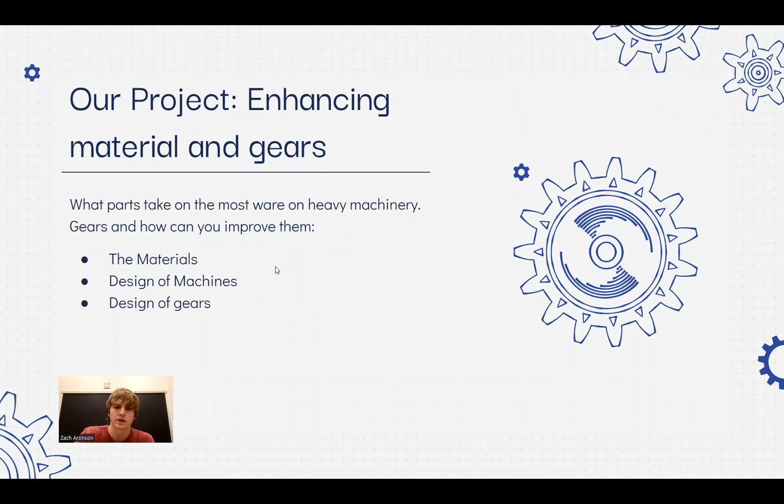The materials we decided to use for our idea would be an expensive material, but higher quality, which would be aluminum bronze, to make sure they were able to withstand longer and we didn't have to take as long to replace them.

The designs of the gears would depend on what they're being used for. The bigger ones would have more power behind them and take longer, but the smaller ones would have faster rotations, though they would be more finicky and used for smaller operations of the gears.

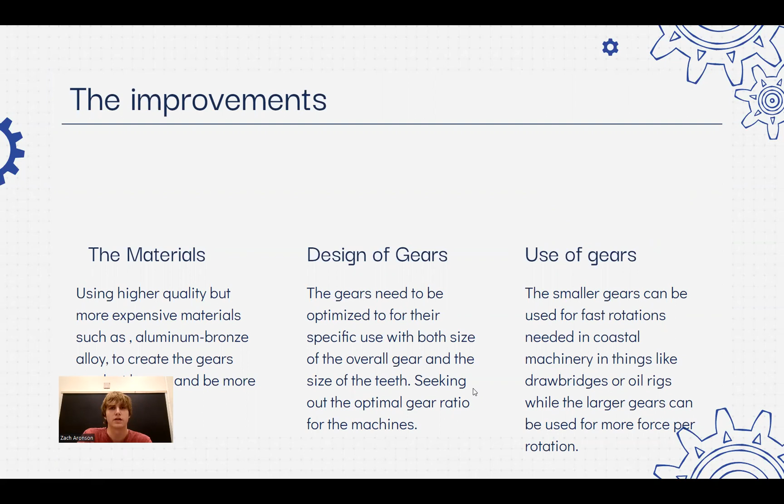It was also important for us to find what gear ratio we needed to make sure that the gears were optimized in a way that we could use them.

Corrosion was a big part for the gears we were using, because since it was a coastal area, salt water corroded the gears faster than it would normally. So we needed to make sure the metals we used were more resistant to corrosion.

We wanted to make sure the metals were more dense because they needed to be stronger since they were used more often in coastal areas. Also, if a machine fails in coastal areas and things get wet, it's a lot harder to repair.

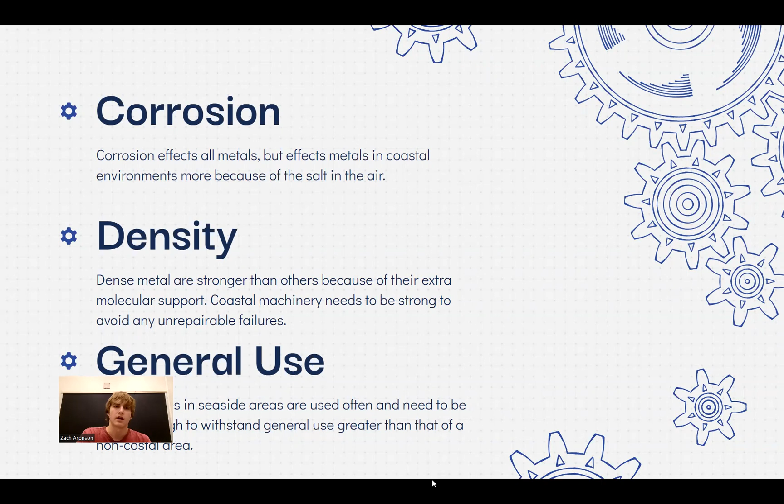What role does chemistry play? Basically, we were looking at the building blocks of the different machines, which are gears, and chemistry is the building blocks of the elements that make the gears.

Our team was Carter, Brandon, John, and Zach, with Carter being the team leader, Brandon being the team facilitator, John being the project manager, and Zach being the research facilitator.

Some of the challenges we faced were being able to find time during different schedules and commitments, and coming together on a single idea. But we made sure to plan around everyone's schedule and make sure everyone's input and ideas were out there when we were choosing our thesis.

Hello, I'm Zach. I'm the people person on the team. So we had several original theses.

Our first thesis, which was the one we ended up going with, was the first thing we thought of when we got assigned mechanical engineering for our problem. It was about gears, what type of gears, and how the metal is affected by salt water and the coastal environment. Our second proposal was thinking about how much destructive force is on the coast and how structures need redundant supports and to be built to survive the extremes.

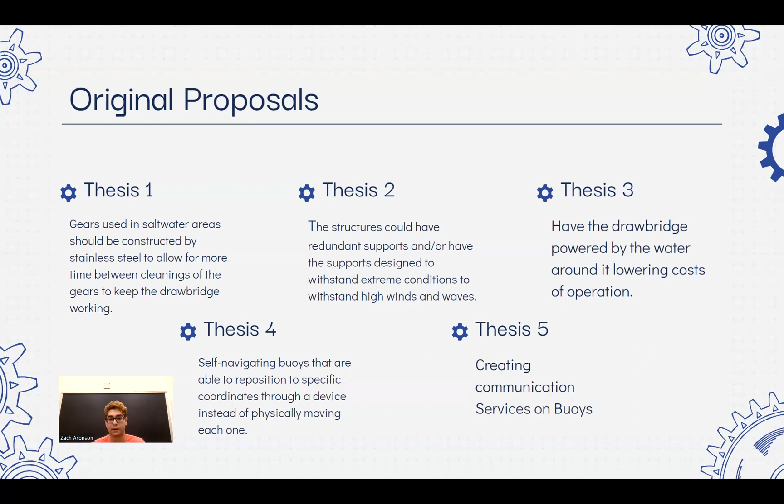Now, figure one, one of the places we visited on the boat trip was the SS Selma. This is a boat made out of concrete and rebar, and we can show how much rust all of the metal has gone through, and the corrosion and mass amounts of damage that the ocean has done to it.

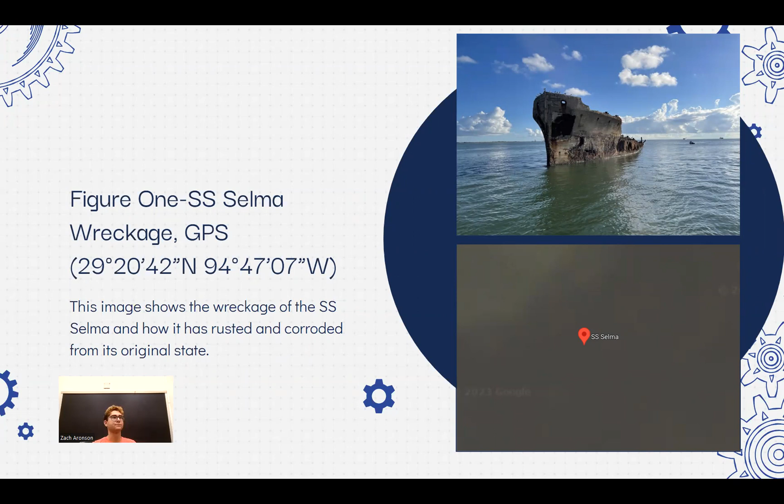We're looking at our Figure 2 here at Pelican Island Causeway. We got to see the on-ramp that we take every day to go to school and see how dependent it is on gears and how much mechanical requirements it needs. Just connecting that back is seeing the requirements for each process that we have.

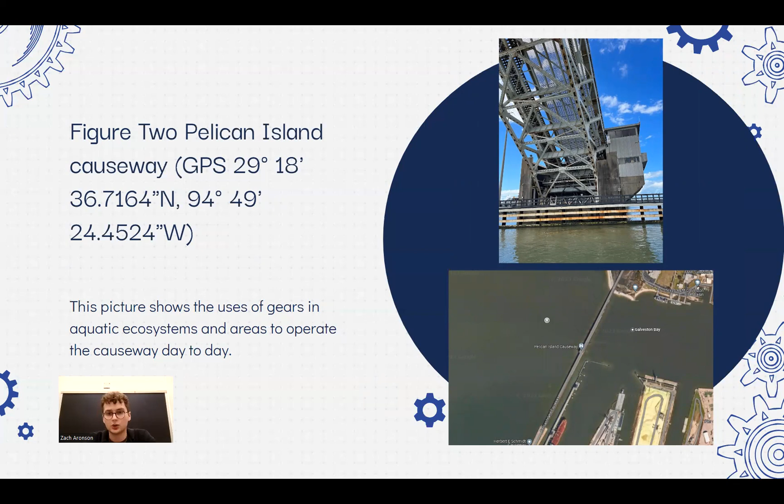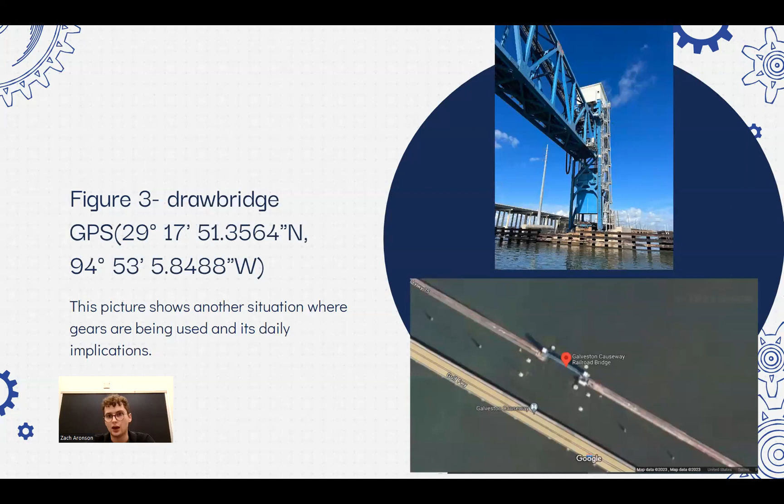And then with the even larger bridge on the causeway, we get to see it being used, and this is a daily use, and it's heavily used. We can see the gear actuation and usage, and it's being incredibly exposed to the sea. So these gears need to be built to withstand heavy use, heavy need, and heavy surrounding difficulty.

So it does connect into our idea where each of these are serving a purpose overall, and really well implements the ideas of having good quality materials, good quality design, and thorough thought processes in how much we're going to use them.

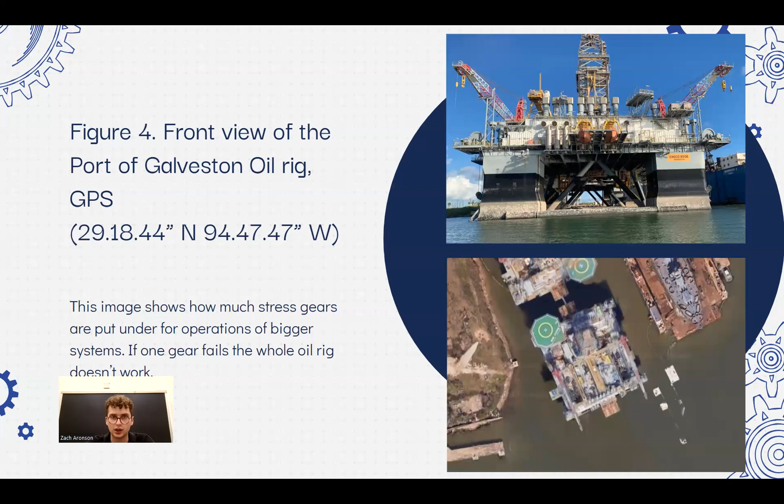So that goes over a majority of our figures, and that just covers our visual aspect of our paper.

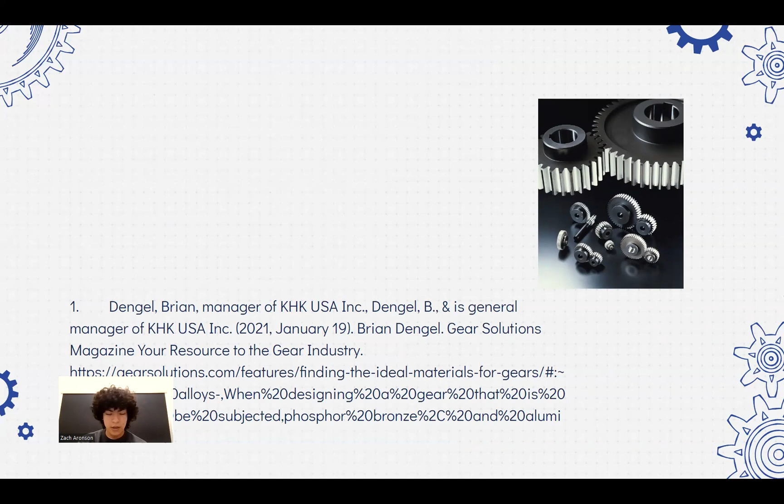Our first source was the Gear Solutions magazine for the research into the gear industry by Brian Dengel, and this was very important for us so we could determine the alloys that were best used for the gears, their resistance to corrosion, and which ones we would determine are best used for our project.

Our second source was the pack rust identification, and this was mostly used for the Selma and how we were able to determine the corrosion involved around it, and then also how we can avoid that corrosion that was on the Selma.

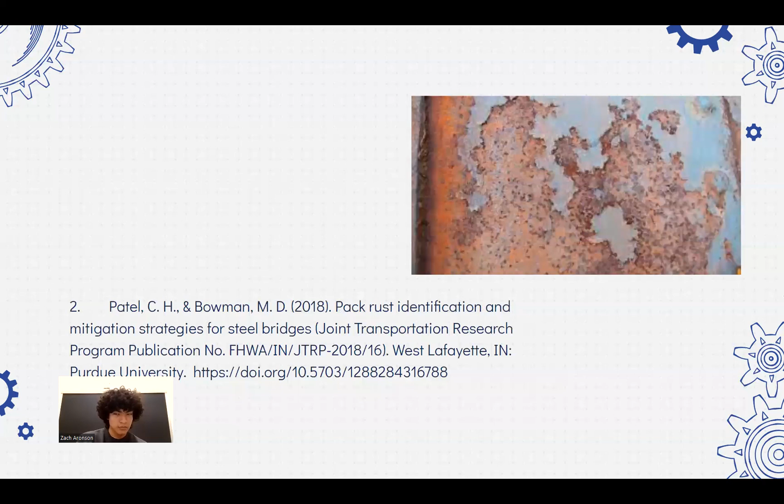And then our other one was the types of gears, and we used this one so we can learn which gears would be utilized best for the bridges that we were designing, and also the designs that would be best appropriate.

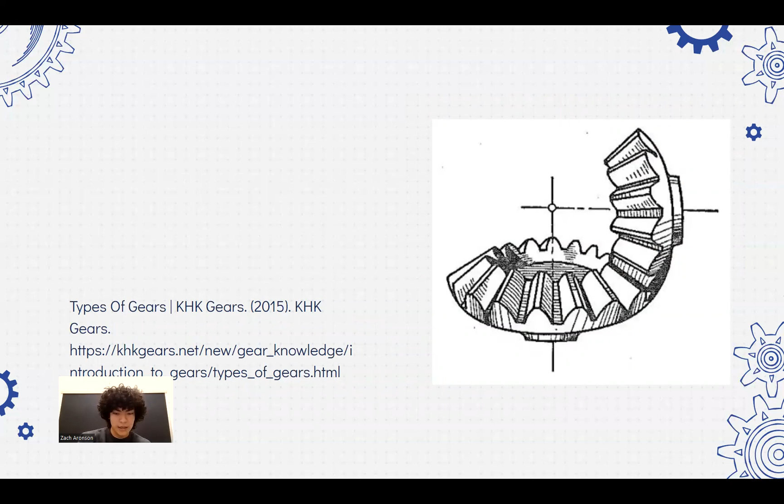Another one was the types of drawbridges we can use, so we can determine the gears and also the requirements for the strains and the environments, to determine which bridges and gears were best suited for each other.

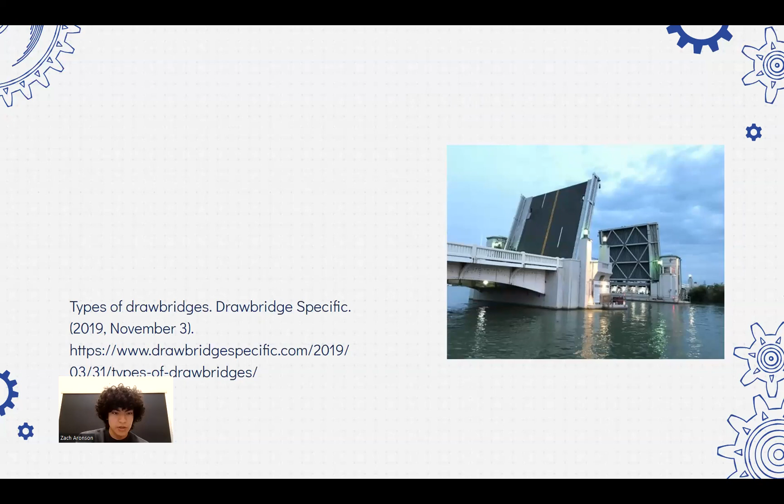This was also another source that we used so we can determine a bridge in a different environment, so we can see how it affects what is needed to build a sustainable bridge for a coastal region compared to a city region.